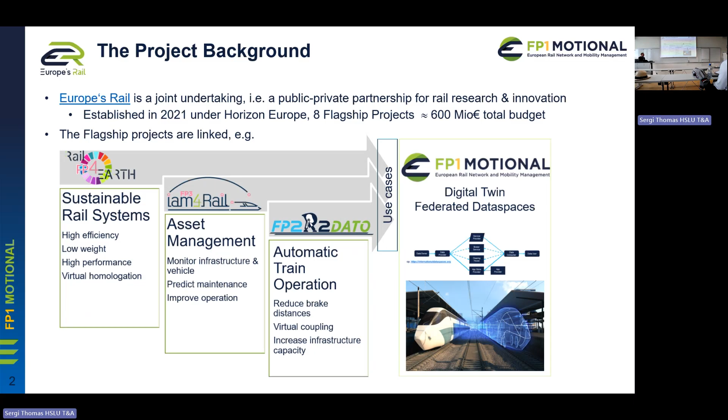These flagship projects provide use cases for the flagship project where I'm working. I'm leading a digital twin work package, and there's a work package in parallel led by Knorr-Bremse, who works on federated data spaces for railways. You will see later on that these both work packages are interrelated somehow.

What are the requirements and demands? What is the job that I have to do there? For instance, in flagship project 3, I scanned once the grant agreement - when you look for the term digital twin, it appears 60 times in that document. So a lot of digital twin work, but the idea is that someone organizes these digital twins in a way that modularity, interoperability, and composability is possible between these different digital twins. That's my task - to support these digital twin works in these specific flagship projects.

It was a requirement of the core as well that I apply functional mockup interface. Actually, the first 3 years of the project it was more or less my job to get the core community familiar with functional mockup units. Next year I have to submit at least 2 digital twins with real data at technology readiness level 5, and later on we'll proceed with the readiness level.

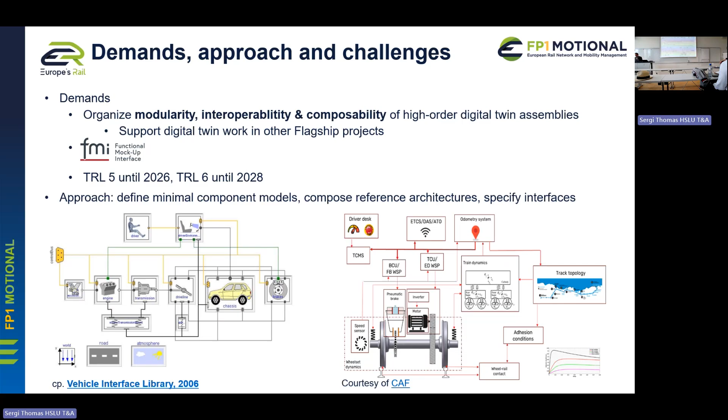What's inside the model doesn't make a big difference - that's not that interesting. The important thing is that the architecture is defined in such a way that, in the railway case for instance, one brake supplier may be Knorr-Bremse, who defines the brake system. If the OEM likes to replace the brake system supplier with Faiveley for instance, it's possible that these parts are exchanged together. Here you see a comparable architecture provided by the OEM CAF, a Spanish company that makes rail systems.

Well, that's the approach - what are the challenges? You may know that each time you use the term digital twin, you get a different understanding - everyone understands something different behind that. In order to present that, I use this diagram.

For instance, each digital twin may cover different parts of the system, maybe only the digital twin of a damper, or of a complete rail system. The digital twin may also differ with respect to the different life cycle, or which period in the life cycle of time. So everyone understands something different behind that term.

That's one problem. The other thing is simulation of rail vehicles is much more complex than automotive vehicles. For instance, if you have 32 wheel sets in one ICE train set, not only 4 wheels like an automotive vehicle, it's more computationally demanding.

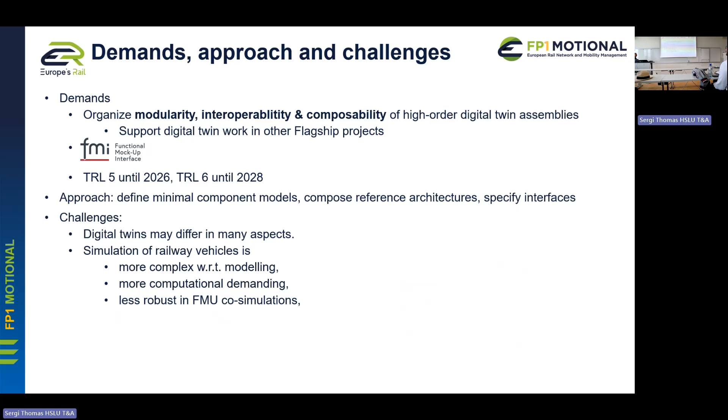And since we have to use co-simulation when we use functional mockup units, these co-simulations are less robust than simulations in one simulation tool.

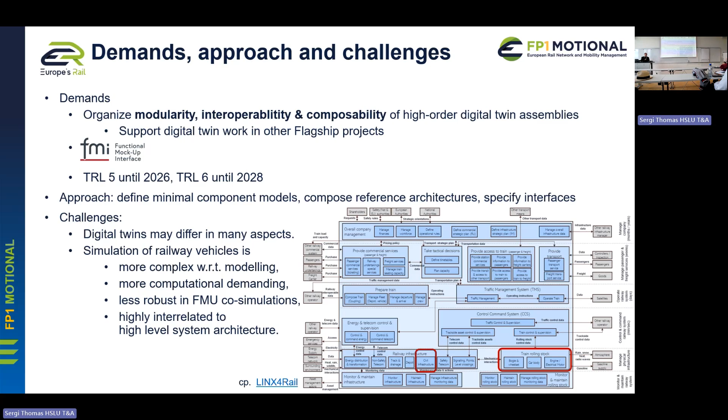Then there's the high system level architecture - picture from another European project - what we call railway vehicle simulation is just covered by its 2 red boxes. There are a lot of other functions in the high-level system architecture, like time scheduling, command system, traffic management system - a lot of systems, so not just one modeling architecture is capable of representing all these functionalities together. You have to organize several architectures that in parts overlap somehow. So those are the challenges.

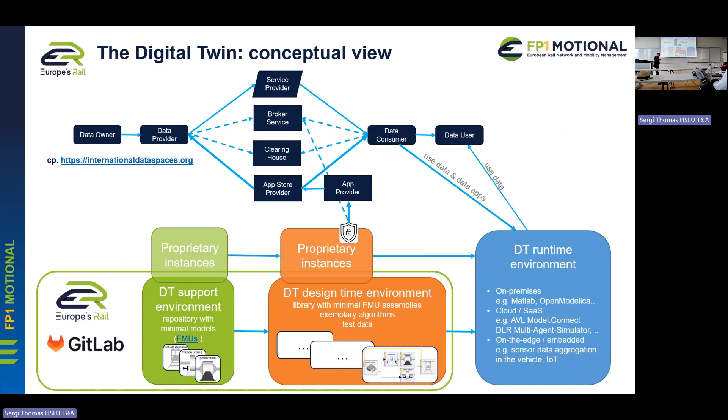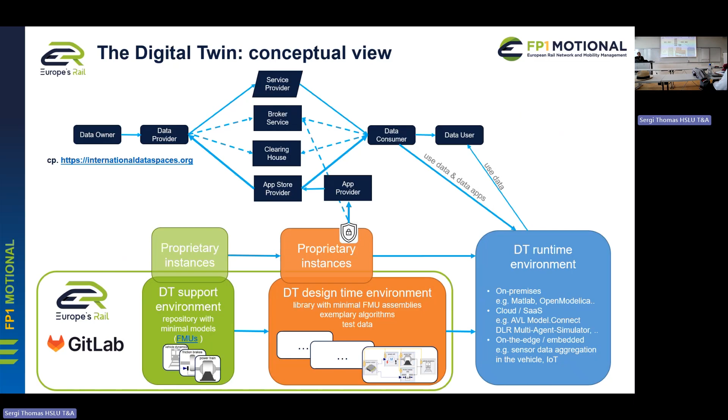I mentioned the architectures, but at the end of the day we would like to interrelate that to a business case. The idea is there's a lot of data around, but the owner of the data doesn't use it or give it to other companies who could use it, because there's no business case around it. So the idea is to use the Gaia-X approach, namely a federated data space. At the end of the day, we would like to provide digital twin components, introduce them as a component of the data space, and you can sell these digital twins you develop. That's our vision for the end of a row of projects.

This is an overview of the use cases considered in that work package. The braking and traction use case will be presented by Gerhard later on. The last column presents the flagship projects where these use cases actually come from. For instance, there are use cases like point machine fault diagnosis, covering asset management of switches, asset management of civil structure elements, and the HVAC system. So a lot of different use cases to be organized.

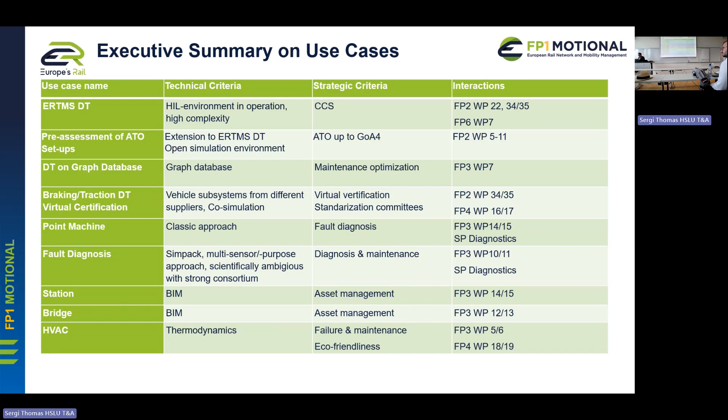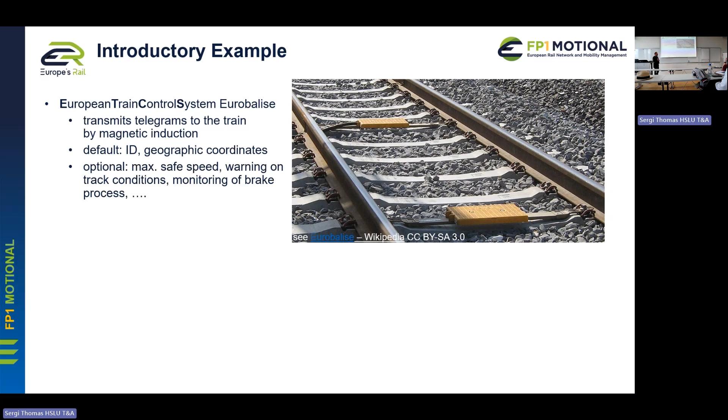Now we come to a little example. It's about so-called Eurobalise - these are the yellow boxes you see on the railway line. These boxes are part of the control system of the railway. As soon as a train passes, these boxes transmit a telegram to the train. The minimal information transmitted is the ID of the Eurobalise and the location, but additional information can be exchanged - for instance, you can initiate braking applications, or tell the train the maximum speed it has to run along the track ahead, and stuff like that.

The use case itself is organized like that. You have a real train that runs along a given track, and as soon as a Eurobalise is passed, the message is logged or provided as a data stream. A virtual train runs along the track, but the track is specified by design information, as it should be. We take algorithms that compare these two data streams and issue an alert as soon as a mismatch between these protocols is measured or noticed. I have to say, at the current state of the project, what I called a real train is still done in simulation only - this will be done in reality in the course of the next year.

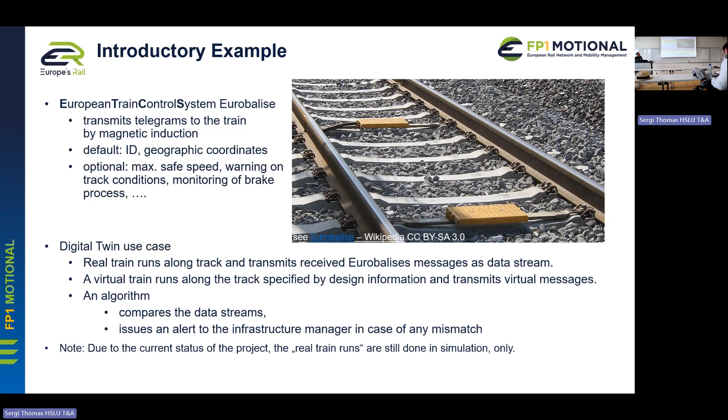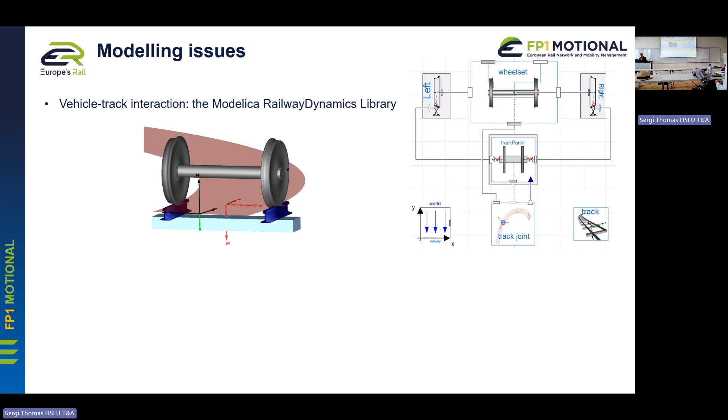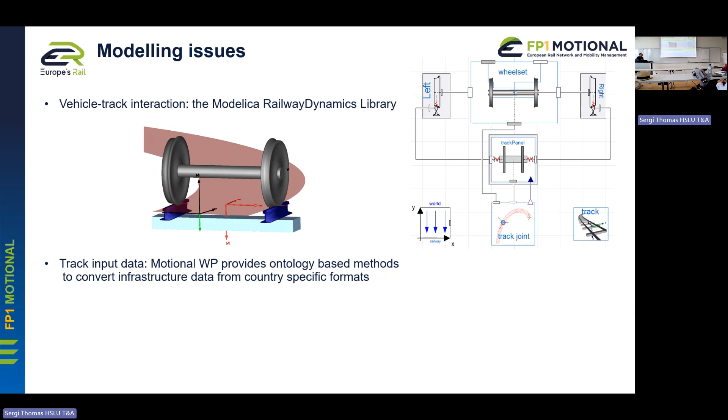What are the modeling issues? First, we have to model a vehicle running along a track. I have the advantage of being the main author of the Modelica RailwayDynamics Library, so I'm able to simulate a railway vehicle running along a track. I use that and export an FMU of that simulation. As track input data, every infrastructure owner has their own data format to describe their infrastructure, but in the European project there's one work package that provides ontology-based methods to convert infrastructure data from one country's format to another. So now we're able to use one XML format that describes the infrastructure. For instance, we need the track line described as a twice-differentiable curve, so the geometry is smooth. The information on the Balise and its position is also covered by that infrastructure definition.

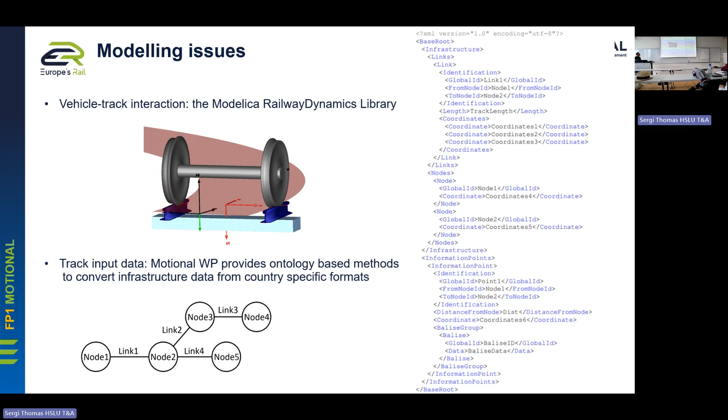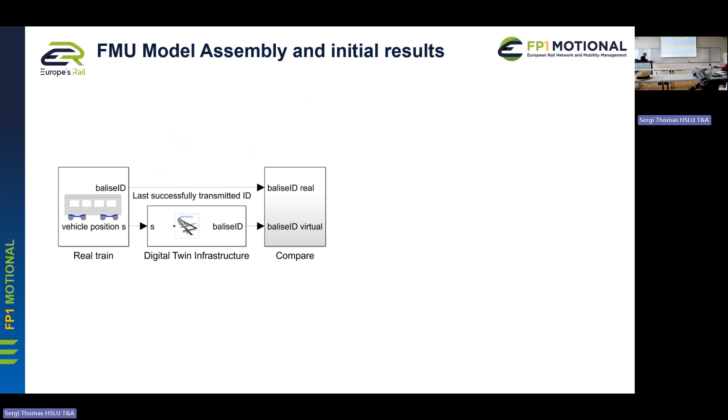Now the simple example - we have one FMU that simulates the real train. We have information on the vehicle position transmitted to the virtual simulation, and then the comparison of both is done. In the little plots above, you see we run with a constant velocity - you see the real Balise as soon as one is passed. You see here one problem: obviously this one Balise has not been noticed while overrunning. So that message could be provided to the infrastructure manager in order to initiate an appropriate action.

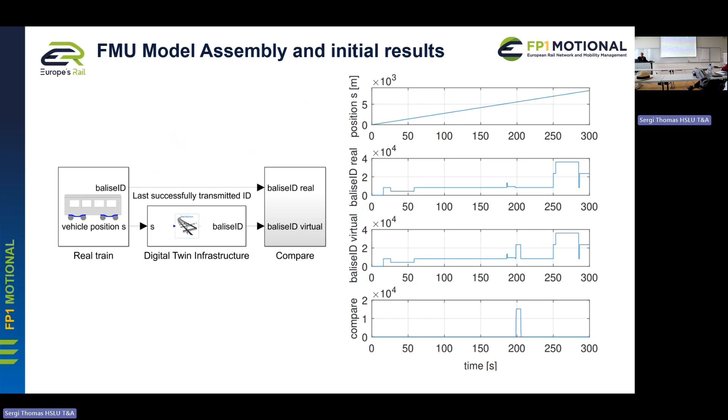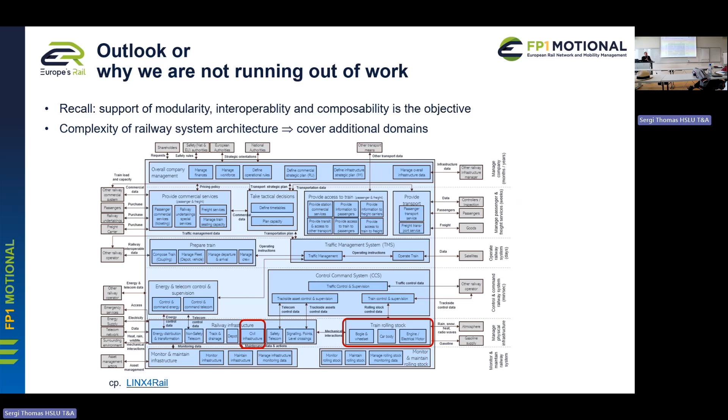So I'm coming to the outlook - what is ongoing right now? First of all, my task is to organize modularity, interoperability, and composability. We have to consider the system architecture and try to organize architecture that overlaps somehow - that is not an easy thing to do. We have to raise the technology readiness level. We haven't organized real-time data exchange so far. We have to organize the integration into that rail data space that was installed or initiated at the last InnoTrans conference 2024. We have to consider AI modeling - that's also a task we have to do.